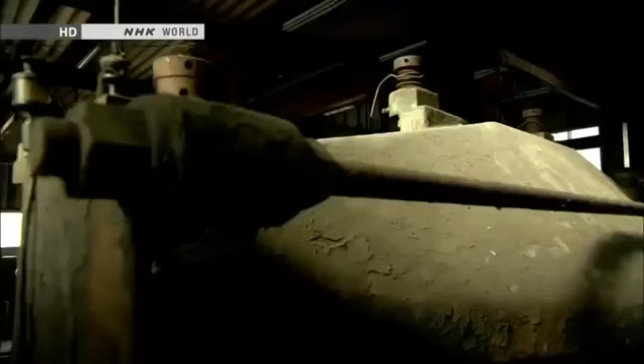In a workshop near Mount Fuji, a curious being has appeared. It's 3.8 meters tall and weighs 4 tons. It is a giant humanoid robot named Kuratas.

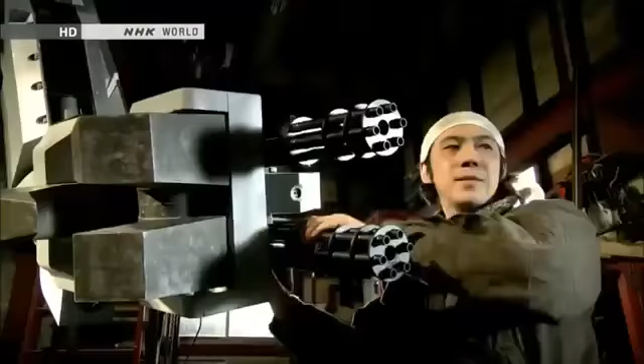Kuratas is a contemporary artist's creation. He holed up here for 2 years, building the robot with input from an expert.

He calls Kuratas a work of art, but it's a sophisticated piece of machinery. A person seated inside can control the robot, move its limbs, and grab things.

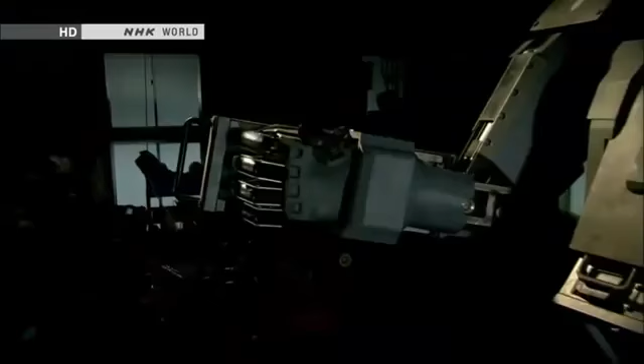The artist says he was inspired by robots in science fiction tales and animation. That vision sustained him as he worked in solitude.

Things that were once unthinkable are becoming real. How will robots evolve? Well, military applications could be one option. They'll probably become more and more like humans. They could surpass us in strength and ability.

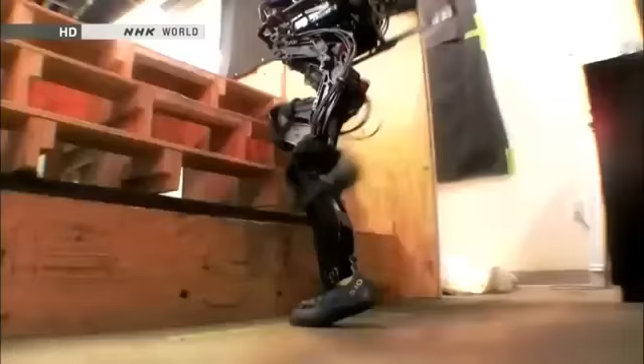People long dreamed of creating these extreme machines. Now, humanoid robots are here. They think like we do, move like we do, and even sacrifice themselves for us.

We want our robot to change society, because robots must be useful. Electronics and computing, progress in vision systems, there are many pieces of it. We will see much more capability continue to grow.

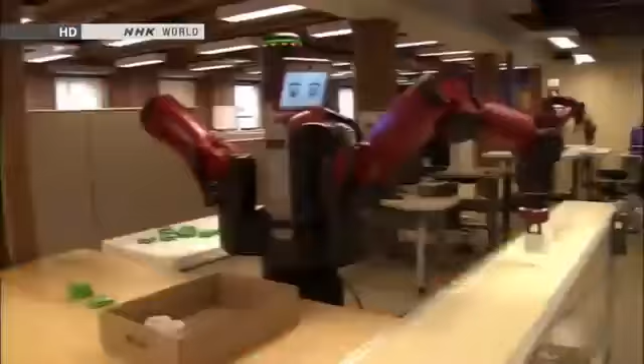Since the Industrial Revolution, people have entrusted some jobs to machines. But there may come a day when humanoid robots do much more complex jobs. Then, what will people do?

You'll see more and more robots doing things in society, whether it's manufacturing, service applications, or home healthcare applications. The key will be skillfully dividing labor between humans and humanoid robots.

The disaster that hit Japan in March 2011 accelerated efforts to develop robots with human traits. The Fukushima nuclear accident left people powerless.

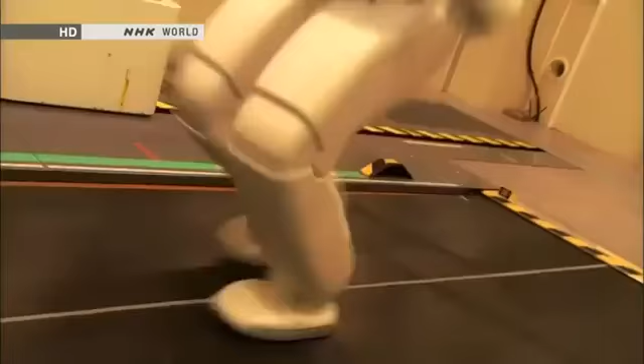Robots can take over when things become dangerous. They can plow through rubble, climb ladders, even make repairs. People are turning to humanoid robots to handle all of these tasks.

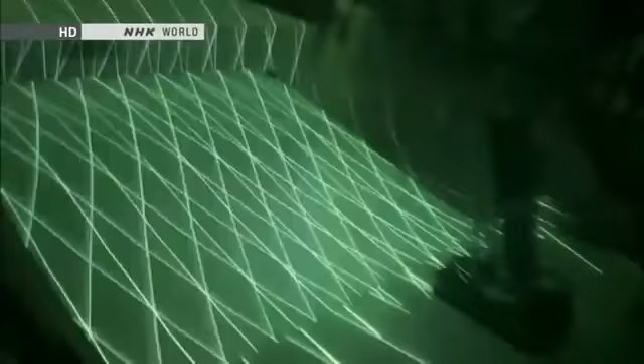We're eager to launch it soon to end the crisis. By joining forces, we can make a truly useful contribution.

Only a humanoid could do it. The day will come when robots will really assist mankind. The nuclear disaster in Japan sparked explosive advances in humanoids at the front line of robotics development.

This program explores the future that's fast approaching.

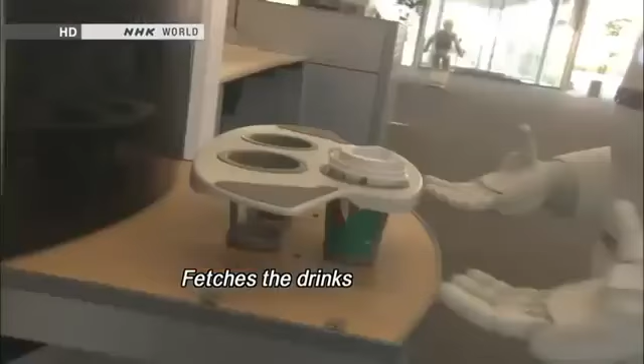ASIMO was created by Honda's research and development subsidiary.

We were allowed to film their top-secret robotics laboratory.

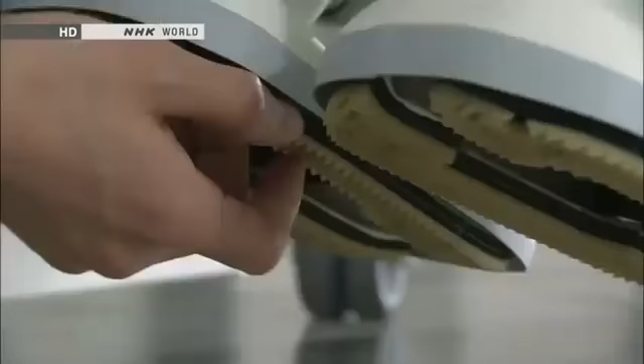Japan is a worldwide leader in the development of humanoid robots. ASIMO is the country's crowning achievement.

Engineers continue to make improvements.

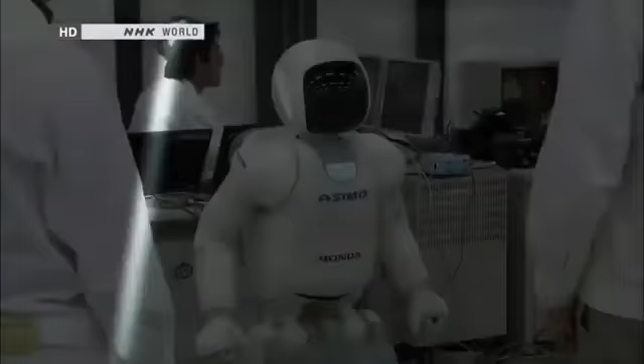ASIMO's most innovative feature is its advanced intelligence. The robot can think and act on its own without human intervention. That's made possible by sensors that replicate our 5 senses.

ASIMO's head contains 8 microphones. It uses them to listen and engage in conversation.

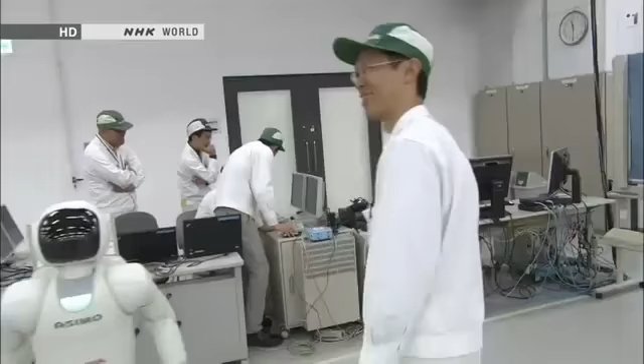2 cameras work as eyes. They can detect humans and use stored data to identify them.

ASIMO's artificial intelligence analyzes a vast array of information. That's how it understands people's requests and takes appropriate actions.

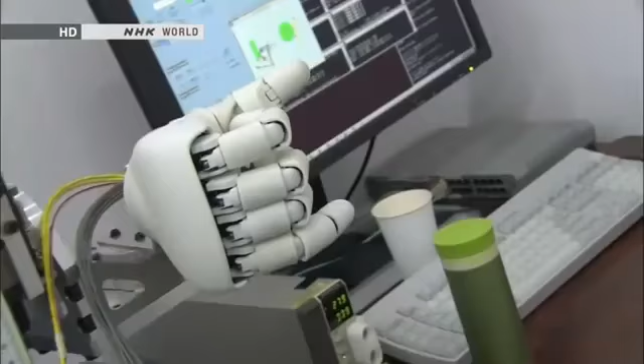ASIMO also has a sophisticated sense of touch. Its fingers can make subtle movements, like a person's. Sensors are embedded in the fingertips, too. They can gauge the hardness of an object, like human fingers do.

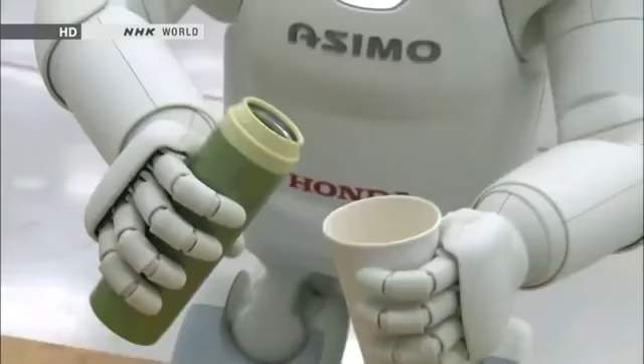Most robots use a fixed amount of strength to grab things. But ASIMO exerts more power to open a tightly sealed water bottle and less when holding a paper cup. Its artificial intelligence uses information from the fingertip sensors to adjust the grip.

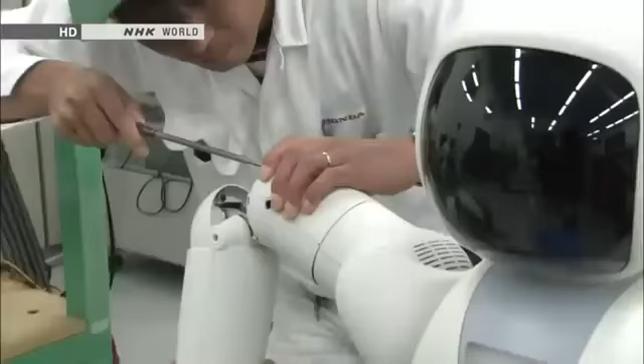The developer's ultimate goal is for ASIMO to be a valuable partner that coexists with humans. The engineers who created ASIMO all grew up watching animated shows about robots, such as Astro Boy, Doraemon, and Gundam. They dreamed of someday making their own.

Satoshi Shigemi is the development team's leader. He has been designing robots for the past 16 years.

From the beginning, we wanted to design a robot that could help people. To realize that dream, we're constantly asking ourselves, what kind of robot would be able to change society, make people happy, and make life easier for people around the world?

Our idea is to create a robot that will change how people live. We're working through the technological issues, one by one, in order to reach that goal.

ASIMO's advanced physical capabilities are revolutionary. The robot can walk and run. It can reach speeds of up to 9 kilometers an hour.

For robots, walking is much easier than running. When running, both feet momentarily leave the ground. Balancing in mid-air is no easy task.

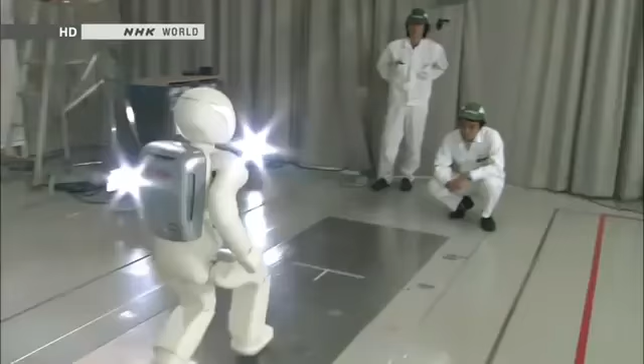Maintaining posture while jumping or floating in the air was a major technological breakthrough. ASIMO leans its upper body slightly forward to maintain overall balance. It goes forward straight in the air.

Sensors in ASIMO's waist measure the robot's angle. It leans slightly to compensate, forward or back, side to side. That's how it stays perfectly balanced in the air.

ASIMO has been evolving ever since development began in 1986, much like a growing child.

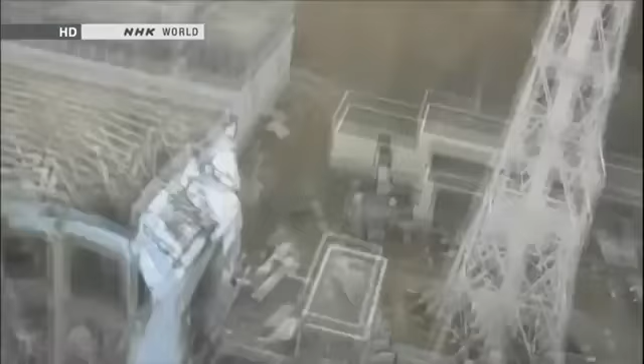But something happened that made researchers realize ASIMO's real-world limitations. It was the accident at Tokyo Electric Power Company's Fukushima Daiichi nuclear plant. The damaged reactors released radioactive substances, making it difficult for humans to deal with the crisis. People needed something that could confront the dangers and bring the plant under control.

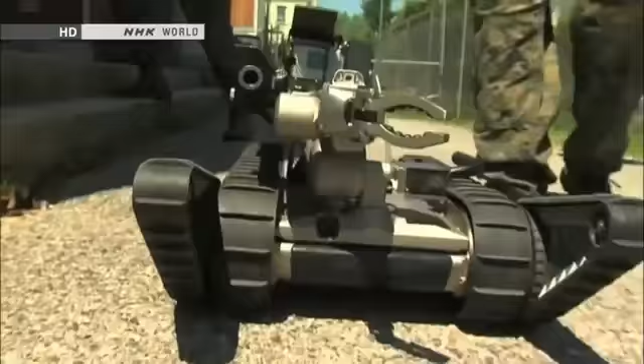Robots. Japanese officials sent a request for robots developed by the U.S. military. The robots were sent to Fukushima in April 2011. They recorded images inside the damaged reactors.

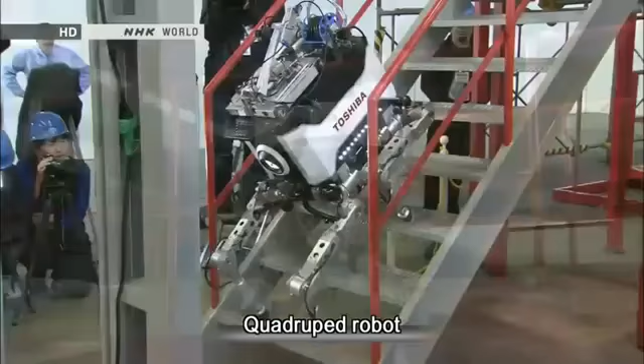Since then, a variety of Japanese robots have been enlisted as well. Robots have proven to be useful, but 2 years after the accident, they're only used for inspections. They're not able to do all the work of humans.

What about ASIMO? Right after the disaster, people flooded Honda with phone calls and emails asking the company to send ASIMO to the Fukushima plant.

But ASIMO wasn't up to the task. It could move nimbly over an office floor and other flat surfaces, but large vertical gaps and obstacles were a different story.

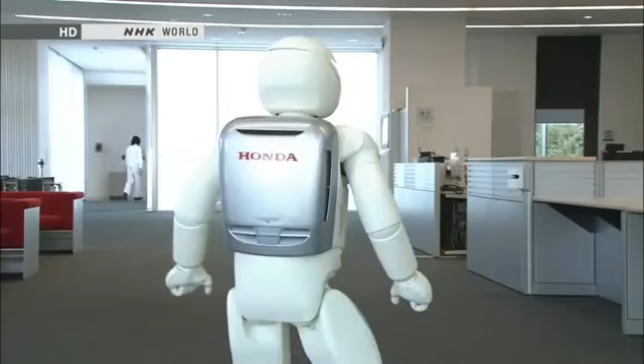We heard from many customers. We ourselves regretted that ASIMO couldn't be of help.

It was obvious that the ASIMO we had built wasn't ready for real-life action. We realized right away that we needed to make something different, something new that could offer immediate assistance.

Honda wasted no time. Company officials offered to create a robot free of charge to assist TEPCO in the recovery. TEPCO accepted. Officials asked for a robot that could open or close valves inside the nuclear plant.

We wanted to flush out radioactive materials that remained inside the pipes and bring down radiation levels in the facility. That was our first goal.

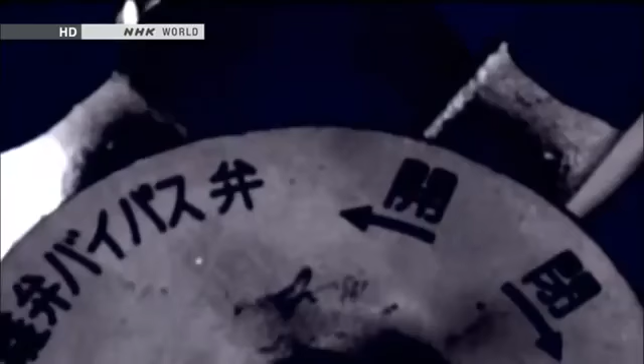Unless we opened or closed the valves, the area would remain highly radioactive, and that would prevent workers from entering the facility and impact the entire decommissioning schedule.

How many valves are there? Each unit has from several thousand to tens of thousands of them.

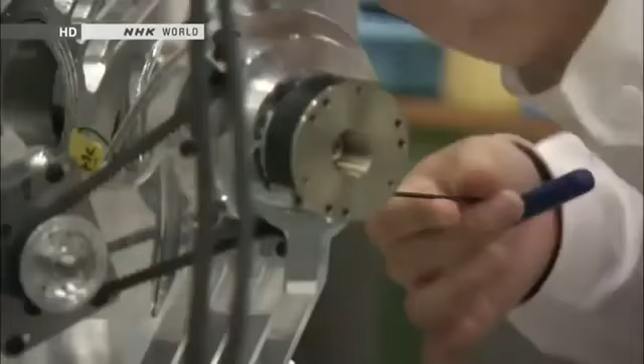In July 2011, 4 months after the accident, Honda began designing a robot for use at the nuclear plant. Members of the ASIMO team were put in charge of the project. A humanoid robot would take too long to build, so engineers focused on making a robot specifically for operating valves.

ASIMO was crucial to their efforts. Its ankles employ advanced balancing technology. Developers reasoned that using it would allow the new robot to work inside rubble-filled reactor buildings.

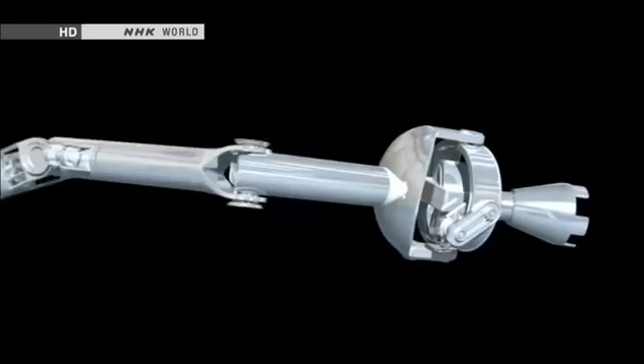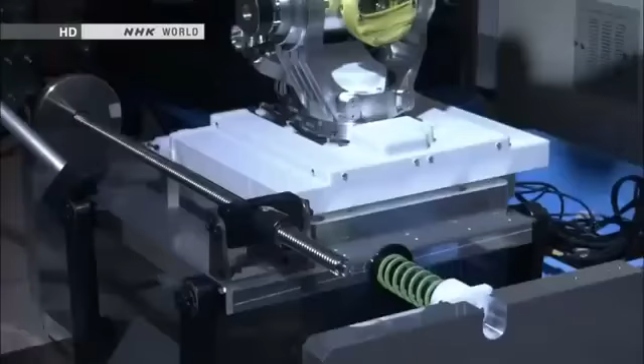The team worked exceptionally fast, completing a prototype in just 4 months. They turned ASIMO's leg into an arm for operating the valves. Even when the base moves, the arm remains steady.

So far, so good. Officials from TEPCO evaluated the prototype at the National Institute of Advanced Industrial Science and Technology. The government-backed group for cutting-edge research contributed to the development effort.

A TEPCO official couldn't take his eyes off the robot's movements. We may be quite demanding. That's okay. We might be quite direct. The test is designed to replicate conditions inside the nuclear plant.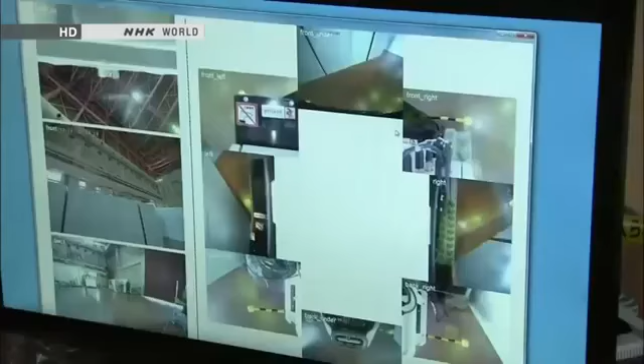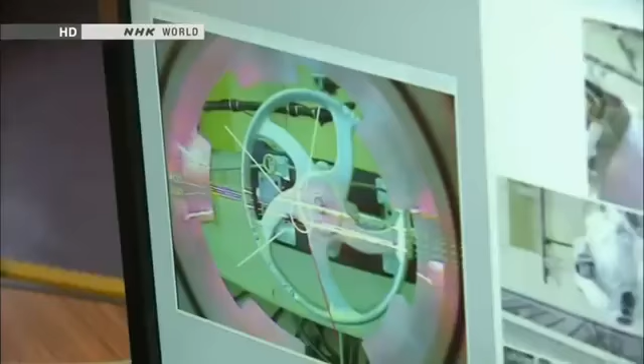The robotic arm is remote controlled. Testers send the arm toward one of the valves. There are a number of unknowns, including the condition of the valves. They may have rusted since the accident. A valve might break if the robot applies too much force, or it might not budge at all.

The robot uses just the right amount of force and turns the valve on the first try. It's passed the test.

This robot can do more than inspections. It could help in the recovery effort.

From what we've seen, the robot seems near perfect. We want to use it as soon as the need arises. It's important that we quickly do what we can to make that possible.

The Fukushima accident also encouraged U.S. developers to design emergency response robots. Department of Defense officials have spearheaded the effort. Before, they had shown little interest in humanoid robots. Now, they view them as vital for disaster response.

The architect of the new strategy is Gill Pratt of DARPA. He oversees funding for leading-edge research at the Department of Defense.

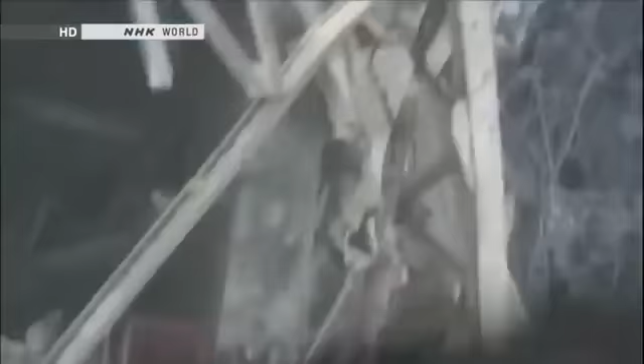There are many aspects of disaster response in Fukushima that inspire people in robotics to work on new capabilities. If they were able to take action during those first 24 hours, the first reactor maybe would not have blown up, in an environment too dangerous for a person to work in.

What's important to us is that the robot is compatible with human environments, compatible with human tools, and also compatible with human operators without special training. As a result, the easiest form that comes to mind is the human form. DARPA is backing the development of a humanoid robot for catastrophes, such as nuclear power plant accidents.

This company is leading the development work. It has already built several military robots. Okay, I'll show you the current status of the robot.

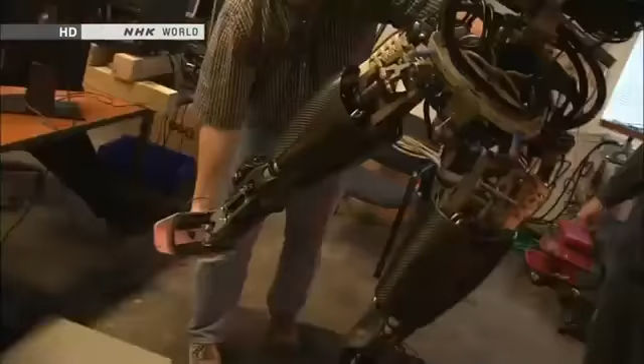This is the first American-made humanoid robot for disaster response. It's called Atlas. Before, U.S. designers had focused on robots with specialized functions.

Why the sudden interest in humanoid robots? Traveling over debris, prying open valves, using tools for repairs — performing multiple tasks like these is impossible for specialized robots. Crises also require robots that can navigate doors and stairs. Humanoid robots are ideally suited for such situations.

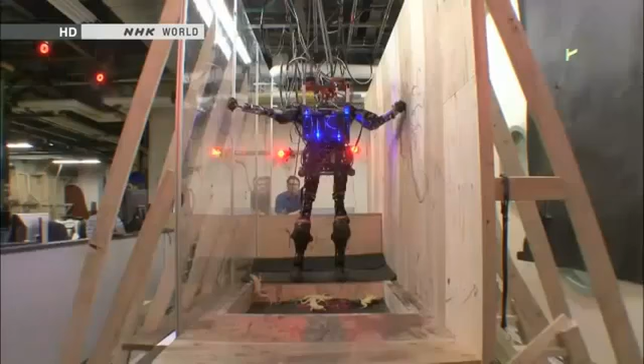Tests of this prototype were going smoothly. It can easily climb stairs and jump from a height of nearly a meter. It can negotiate obstacles using its arms and legs. It can already handle more demanding environments than Asimo can.

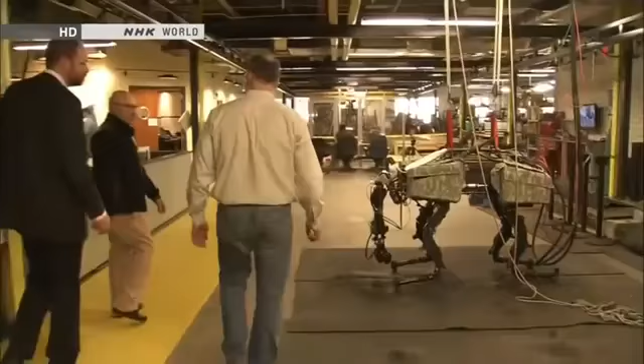Atlas is loaded with technologies originally designed for military robots. A quadruped robot called Cheetah can race through a battlefield at 50 kilometers an hour. LS-3 is for transport — it can carry heavy supplies for soldiers.

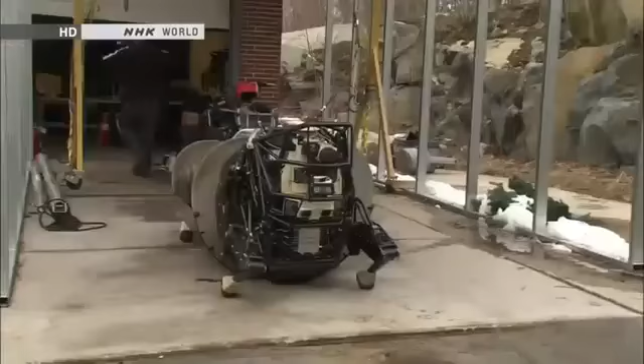The ferocious-looking robot gets its strength from a powerful hydraulic drive system. A hydraulic device can be small yet quite strong. The black cables convey hydraulic power to the legs, generating the brute force required for harsh conditions on the battlefield.

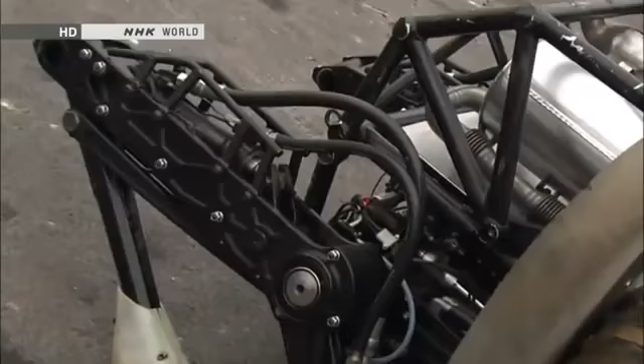A web of hydraulic cables covers Atlas's body. They form a muscular suit of armor for clearing debris.

Another important technology comes from military robot engineering. This machine's joints have a wide range of motion, allowing for flexibility that humans can't achieve. Atlas's joints are capable of moving in 28 different ways. Atlas can crawl through narrow spaces and withstand sudden shocks.

But then we have the knee — this has 3 in the hip, just like us. This way, and then this way. I am very impressed with the number of degrees of freedom. It will be able to do these human-compatible tasks without a lot of the limitations that other robots have.

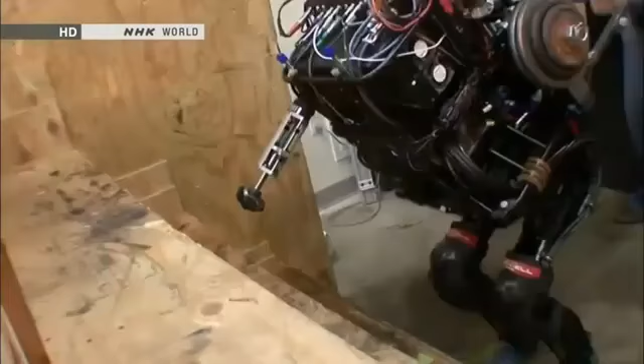Engineers will combine Atlas's rugged body with sophisticated artificial intelligence that's almost near completion. They aim to complete the robot by December of next year.

One reason you see humanoid robots is because there are some people working who are really interested in robots as an entertainment thing or as a performance thing. I think that's different — we're much more interested in basic capabilities for emergency response and rescue. So I don't think Asimo has been designed to do those things yet.

U.S. engineers stepped up their efforts to develop humanoid robots after the nuclear accident in Japan. Japanese researchers are embracing the same mission.

In November 2012, robot engineers from around the world gathered in Osaka for an international conference on humanoids. Gill Pratt from DARPA was one of the participants.

He came to invite engineers to join a project sponsored by the U.S. Defense Department. On March 11th, after 24 hours, if only a robot had been there to go and open that valve, the entire disaster could have been averted. But we didn't have one, and furthermore, we didn't have anyone who could do the job. So shortly afterwards, we actually started planning the DARPA Robotics Challenge.

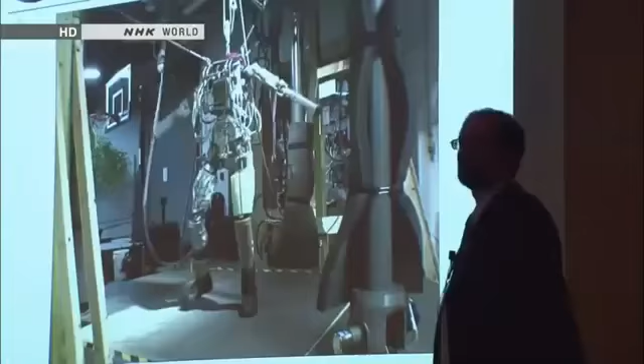They have 2 degrees of freedom, not 1. The Robotics Challenge is a competition to develop emergency response robots for major disasters like Japan's.

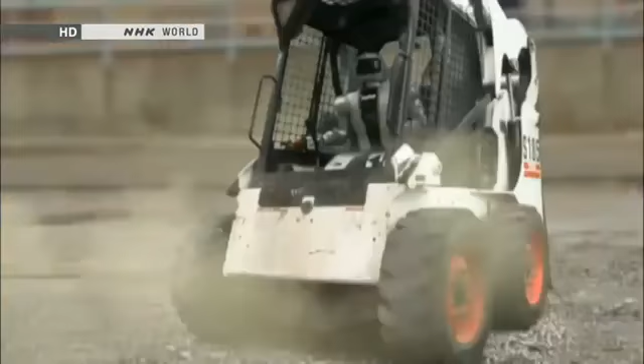The challenge consists of 8 tasks: driving a vehicle to approach a disaster site, walking over rubble, removing obstacles, opening doors, using tools to break down walls, climbing ladders, turning valves, and making repairs.

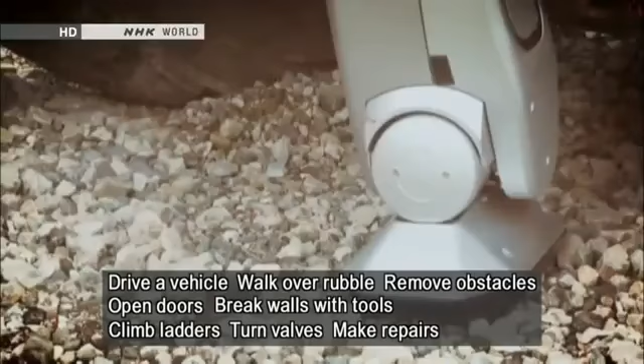A single robot must complete all 8 tasks. The development period is 2 years. DARPA will provide contestants with funding of up to $4 million.

DARPA has received over 100 proposals from research groups worldwide. They include renowned organizations like NASA and MIT.

Japan is at the forefront of humanoid robotics engineering, yet its researchers hesitated to throw their hats into the ring.

To me, it's difficult not to see that some of the results of the DRC are going to be used to advance, as you say, military technology. The DRC is about developing robots that I believe wholeheartedly are completely impractical for military purposes, for offensive military purposes.

Will the technology that we come up with find its way into military systems? Probably yes. But I guarantee you that if you work on a robot for healthcare, there's a chance that technology will also find its way into military systems.

The members of one Japanese research institution wanted to take part in the competition.

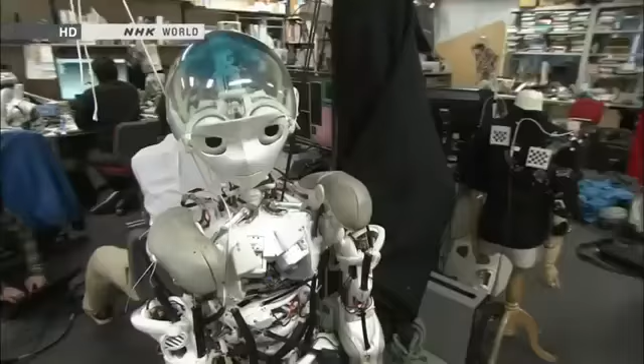They worked at the University of Tokyo's robotics lab. Researchers there, along with those at Honda, are global leaders in robotics engineering. But they faced a major obstacle to competing: the university bans military-funded research.

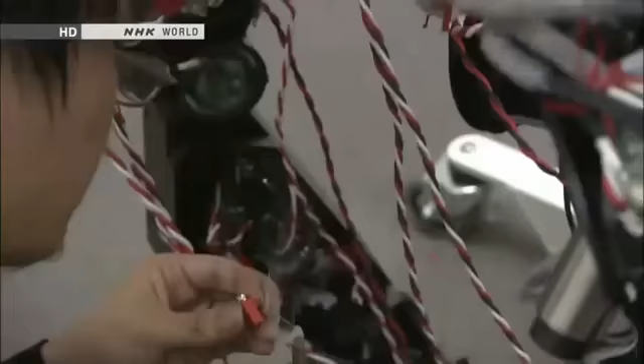Three researchers made a decision. They told the university they were leaving. Then they decided to set up a venture company and enter the DARPA Robotics Challenge. They couldn't shake the feeling that they should leave their quiet university lab and help resolve the nuclear crisis.

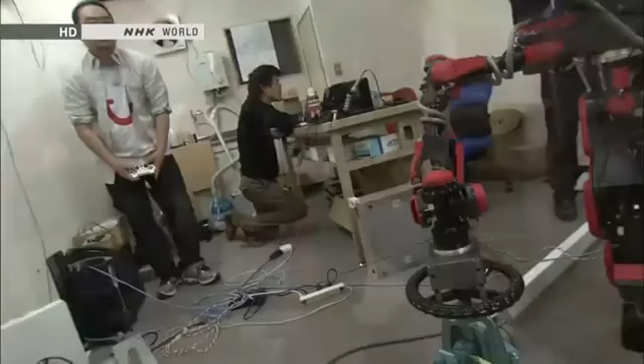A reddish fluid circulates through the robot's body. The fluid serves as a coolant that keeps the motors from overheating. The cooling system should enable the robot to perform hours of grueling work at disaster sites.

The time has now come for the developers to apply their years of research to the real world. A nuclear crisis has happened here in Japan. Radiation is escaping. Researchers in every field must wonder at least once if the technology they've been working on could help resolve the crisis. By joining forces, we can make a truly useful contribution. It's with this in mind that we decided to enter the competition.

One country is quickly catching up with Japan in humanoid robotics: South Korea. KAIST is a government-funded lab for the advancement of science and technology. Researchers there were among the first to express interest in DARPA's robotics challenge.

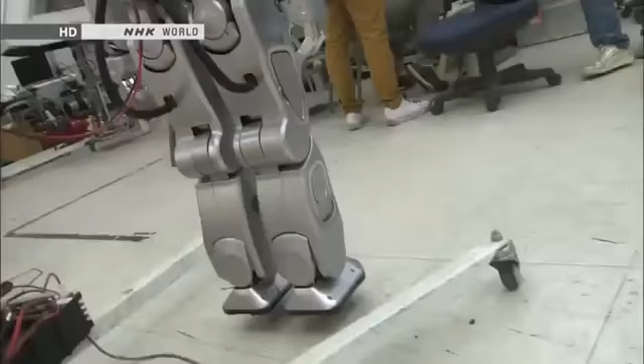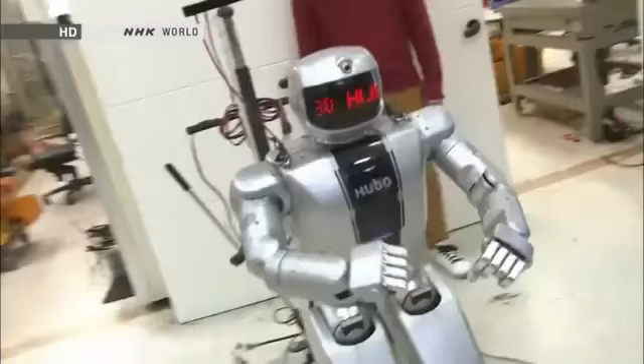This humanoid robot is called Hubo. It's modeled on Asimo, which Honda spent 14 years developing. Hubo was built in just 5 years. Hubo deftly manipulates its hands, and it's also good at dancing. Its moves look just like Asimo's.

Hubo has been undergoing a major upgrade ahead of the competition. It can now bend backward at the waist while walking to handle all kinds of environments. It can quickly pick up tools. The tests were going well.

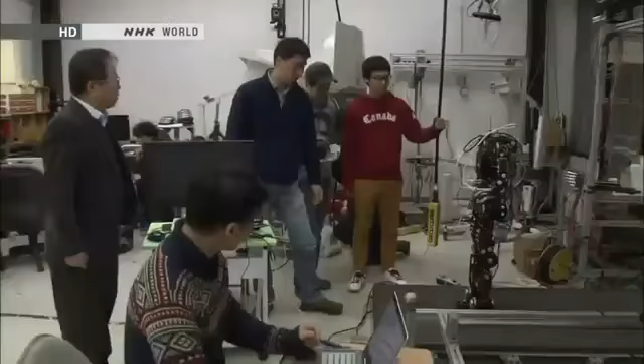People have always compared Hubo to Asimo. Engineers now had a strategy to get ahead of the Japanese developers. They decided to publish certain details about Hubo's design and pursue joint development with researchers at other institutions. One could say that this space inside Hubo's chest captures the heart of their thinking.

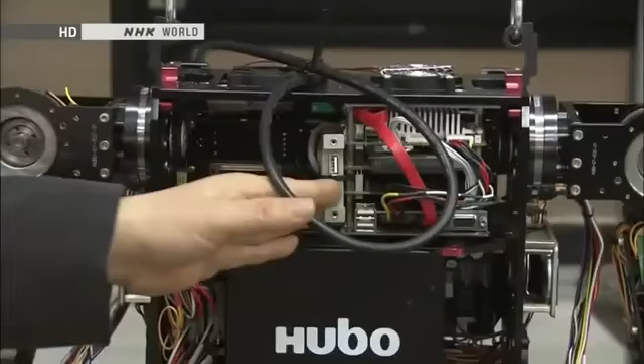It's empty now, but this is where artificial intelligence will be installed. It's removable. Hubo does not yet possess artificial intelligence. Its motions are as sophisticated as Asimo's, but Hubo's movements are all pre-programmed. U.S. universities that lead research into artificial intelligence will develop a brain for Hubo. The stage has been set for a joint U.S.-South Korean team to compete in the DARPA Robotics Challenge.

Sharing is the key to making technological advancements. That's true in South Korea and in other places too. Research shouldn't be confined to one place. People developing humanoid robots elsewhere are too close-minded.

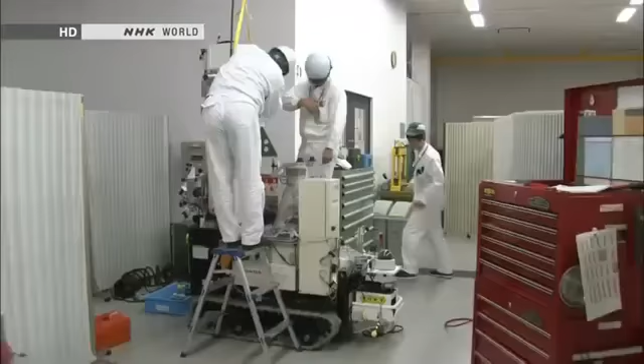Researchers at Honda were also invited to enter DARPA's competition. But they declined. Their energies were focused on designing a robot to tackle Japan's nuclear crisis.

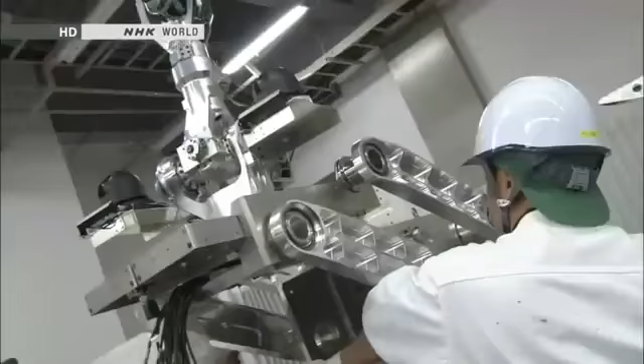Nearly a year has passed since Honda's robotic arm passed evaluation tests, but the device has yet to be deployed to the nuclear disaster site. That's because officials at TEPCO requested a change in specifications. Engineers have replaced the valve-turning hand at the end of the arm with a camera.

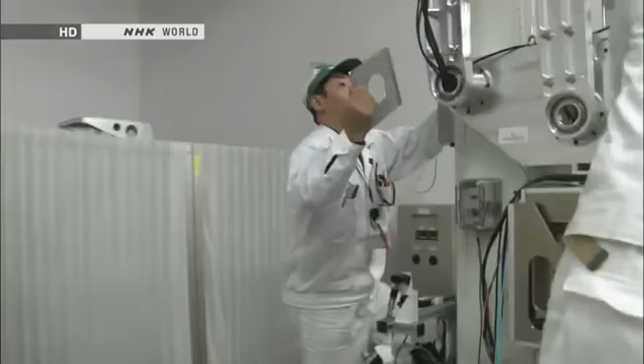TEPCO had changed its plan. Officials decided to put priority on assessing conditions inside the plant's facilities. They said it was too early to have robots work on valves. There wasn't even a recovery plan in place when we were working out the valve manipulation tasks.

Confusion also prevailed at the site. We were expecting valve work to begin 2 to 3 years after the disaster. But the timing has ended up being later than what we'd assumed, 1 month into the crisis.

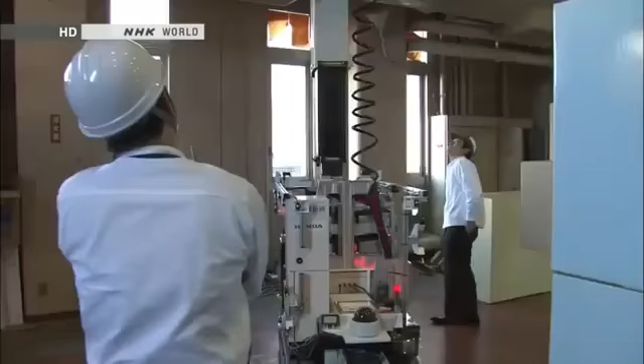The robotic arm will soon be sent to the accident site. It will provide the first images filmed from high up. The robotic arm was not the end of Honda's efforts. Its engineers had another secret mission.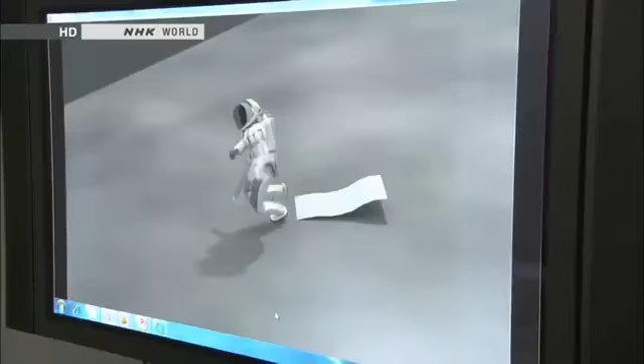A disaster reduction robot would be useless if it couldn't get to the site. It's important to get to the scene no matter what. Disasters create all kinds of debris that crumbles easily or breaks when stepped on. It's because it's dangerous that robots replace humans. That's what makes them valuable. A robot that couldn't get to the scene would be totally useless.

Honda's engineers began developing robots in 1986 with the goal of making people happy. 27 years of research is now being put to the test. As we saw in the Fukushima Daiichi crisis, the bottom line is that robots can stand in for humans in places that we can't go to or that are too dangerous. I am committed to delivering what's needed, when needed, in the shortest amount of time.

The accident in Fukushima spurred the development of humanoid robots around the world. The disaster also prompted people to question the roles of humans.

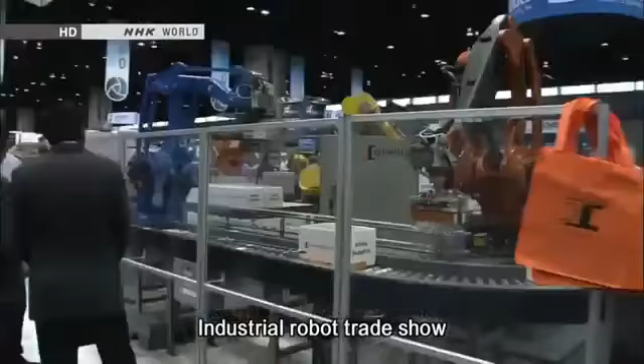One of the largest trade fairs featuring industrial robots took place in January. Global manufacturers displayed their latest models. Companies are developing more and more two-armed humanoids for industrial use.

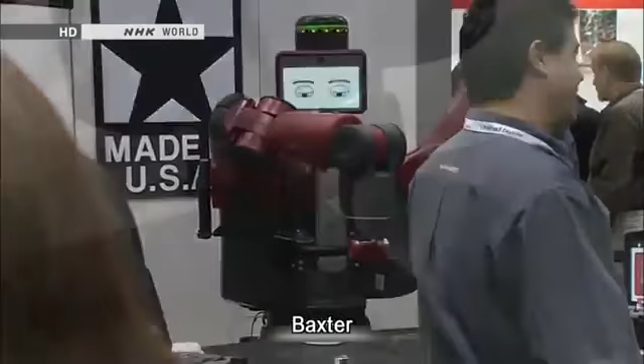One new product at the event caught a lot of people's attention. Baxter was created by the inventor of a best-selling cleaning robot. It's equipped with sophisticated artificial intelligence, and is designed to work side by side with people in factories and other settings.

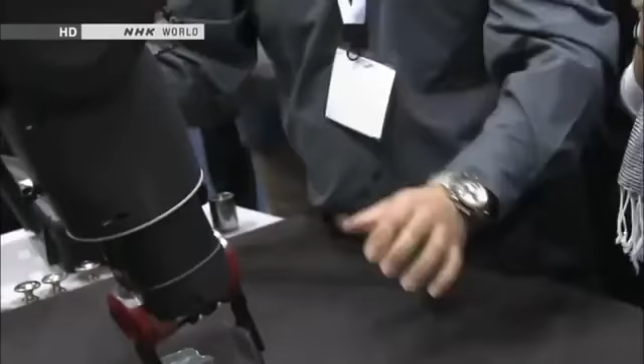The robot's most unusual feature is its ability to master a task in a matter of 5 minutes. All that's required is step-by-step manual instruction. No complicated programming is needed.

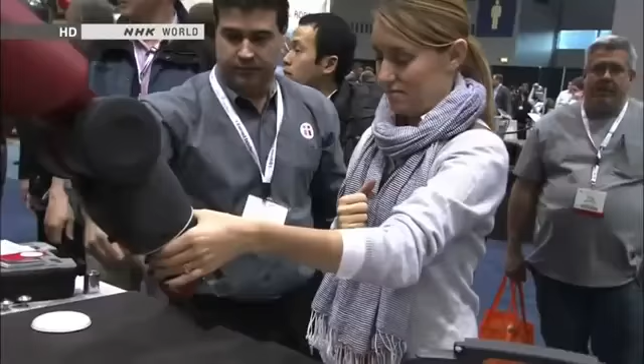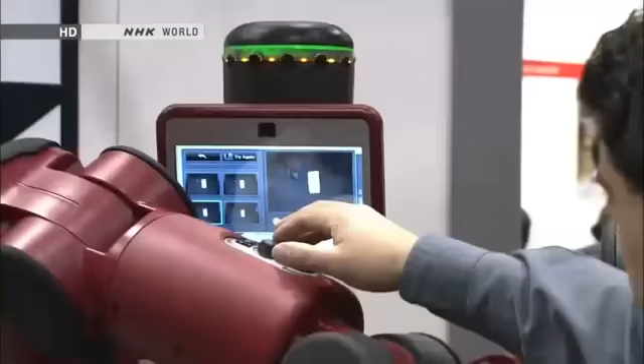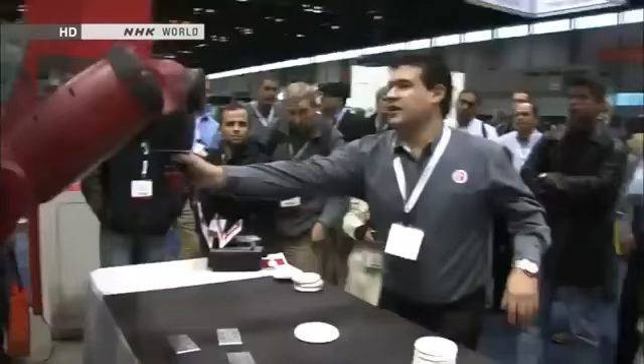The expression of the face on the LCD screen shows whether or not the robot has understood the task.

Baxter costs $22,000, a bargain for a humanoid robot. The maker says buyers can recoup their investment in several months and slash labor costs.

I'm very impressed with it. I work for a small manufacturing company, and we have some older employees who are looking to retire. There are some tasks that Baxter could do for us very effectively. Plus, it would be cheaper than employing a person. It's not going to get tired, it's not going to need to stop. It'll keep running while everybody else is taking their lunch.

The Boston-based manufacturer has a flood of back orders.

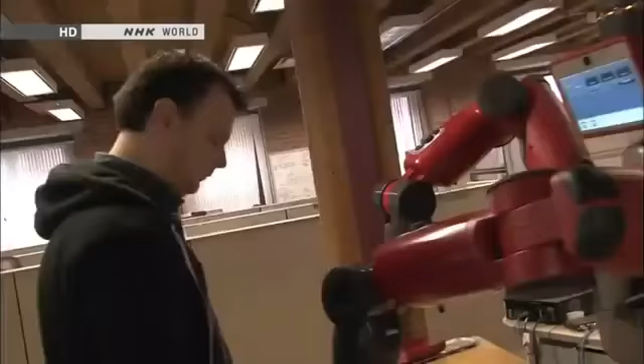Officials say someday Baxter will work at places like coffee shops, taking orders and grilling burgers. Eventually, they expect to have 500,000 U.S. customers.

Today we're focused on manufacturing, and there's a very big opportunity in manufacturing, but there are lots of other places a robot like Baxter could go. We had the Industrial Revolution at the turn of the last century. We've just gone through the computer revolution, effectively at the turn of the most recent century. We are now into the robot revolution.

Will people and robots someday compete for jobs?

At 8:30 one morning, a group of new employees takes part in daily morning exercises. They are 13 humanoid workers called Nextage. This company began using the robots in earnest last year.

They have 2 eyes and are just like humans. They're cute!

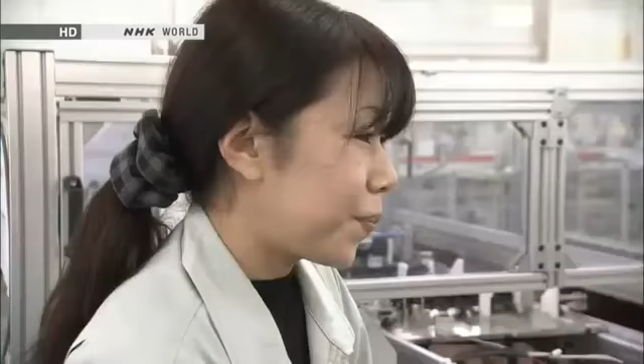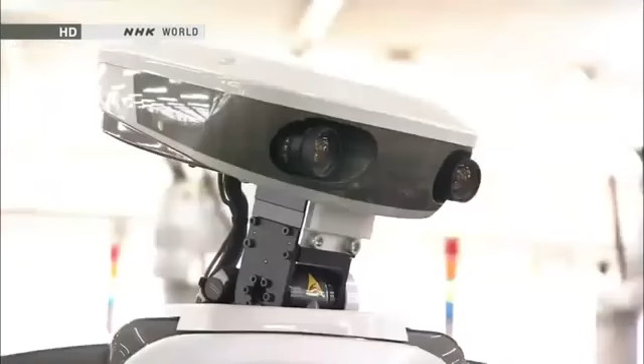This factory manufactures money sorting machines for cash registers. The humanoids work on a production line that was previously manned entirely by humans. The robot visually confirms the parts set in place by a human worker, then it begins its task.